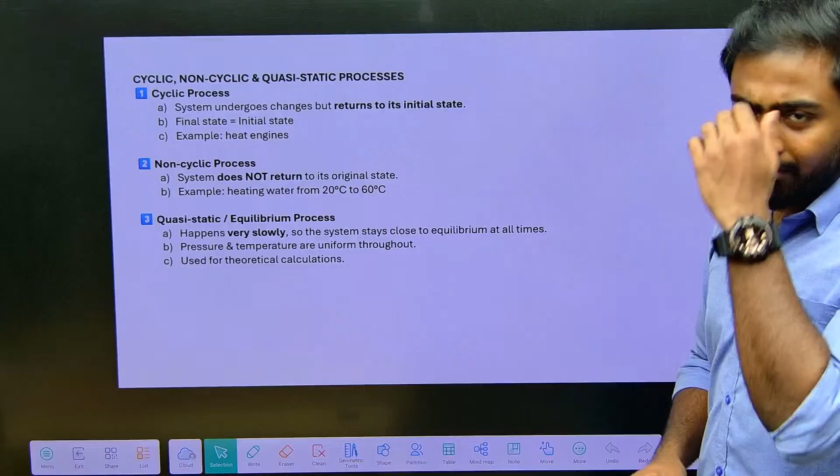So the processes we have seen like isobaric, isochoric, adiabatic, isothermal, everything, right? In last class we were discussing about isobaric, isochoric, adiabatic, isothermal. These are the processes we have seen. Now let's look into the next topic: cyclic process, non-cyclic process, and quasi-static or equilibrium process.

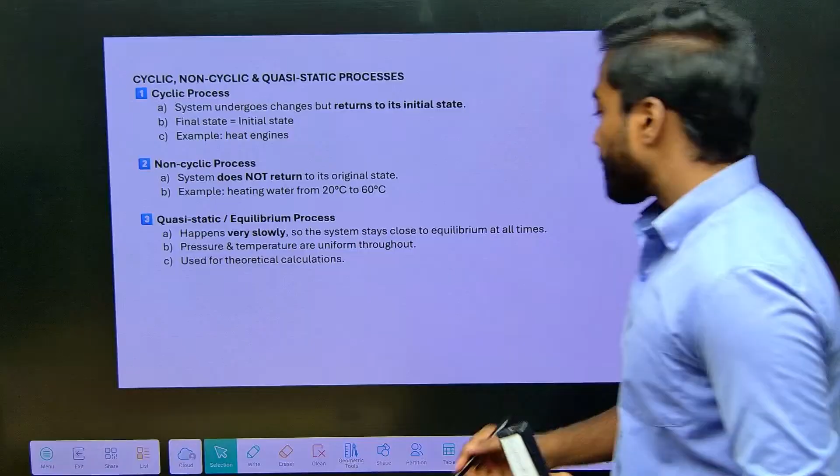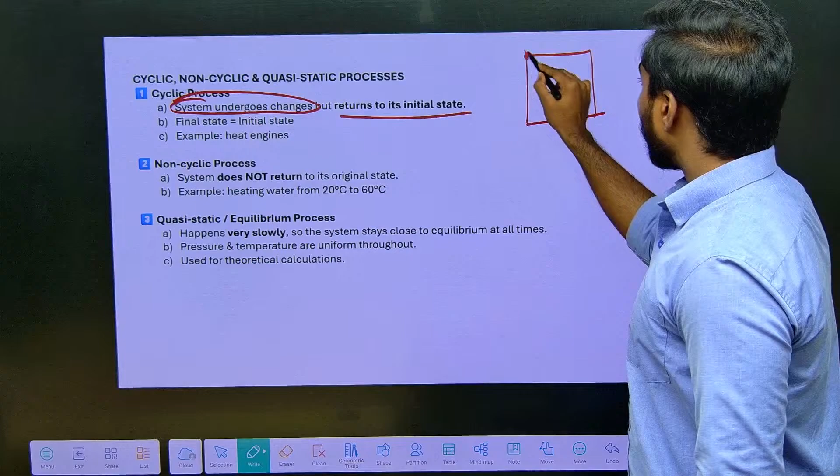Okay, so let's decode and understand, it's simple. Cyclic process is nothing but when a system undergoes a change but returns to its initial position. For example, if I take point A, it goes to point B, again point C, again point D, and again back to point A. So when I'm starting with point A, going to B, C, D, and again to A, which means I am going back to the same initial position. So final state equals initial state. That is the cyclic process.

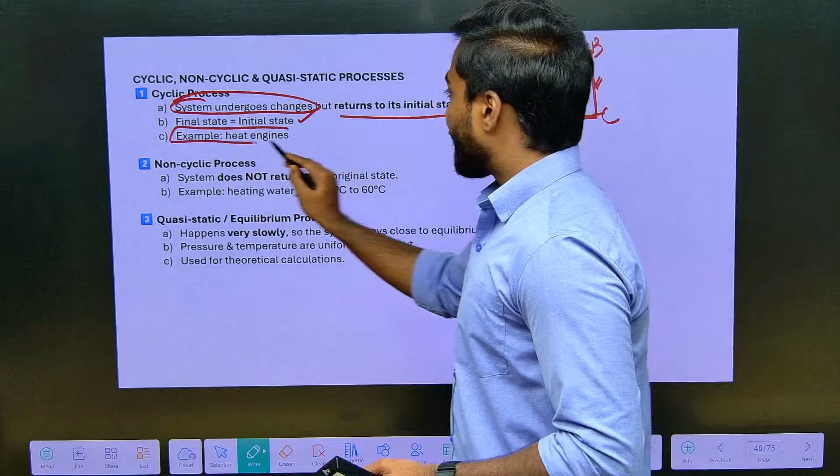And for example, the best example is heat engines.

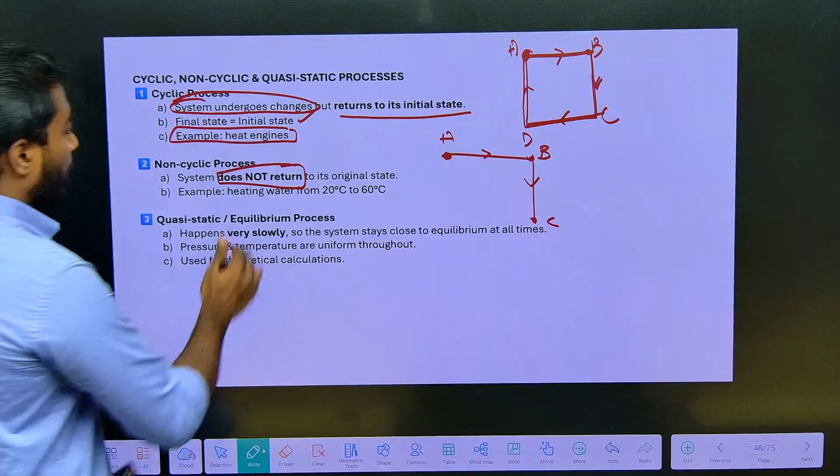Then what is non-cyclic process? A system does not return to its original state. For example, if I take point A, B, C, it has point A to B, B to C, that's it. Example: heating water from 20 degree to 60 degree Celsius. So this is the major difference between the cyclic process and the non-cyclic process.

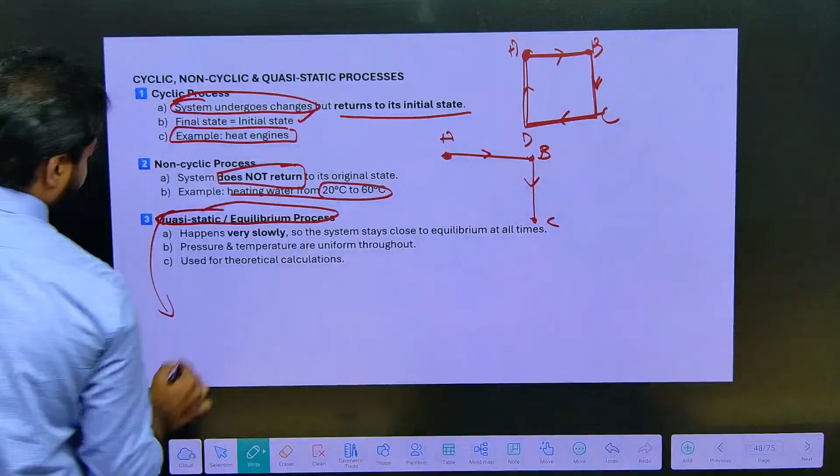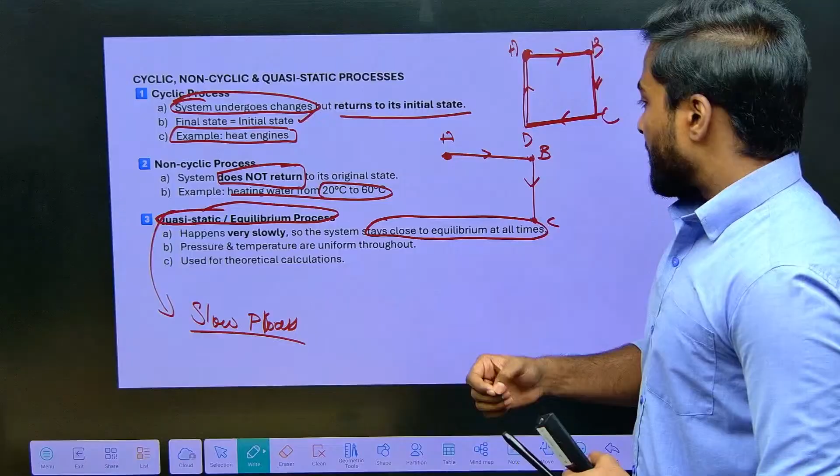When we talk about a quasi-static process or equilibrium process - quasi, we have learned the meaning of quasi, it's nothing but slow. So quasi-static process is a slow process, as we learned in the previous classes. It happens very slowly, so the system stays close to equilibrium all the time. It always stays near the equilibrium condition, that's what they are saying.

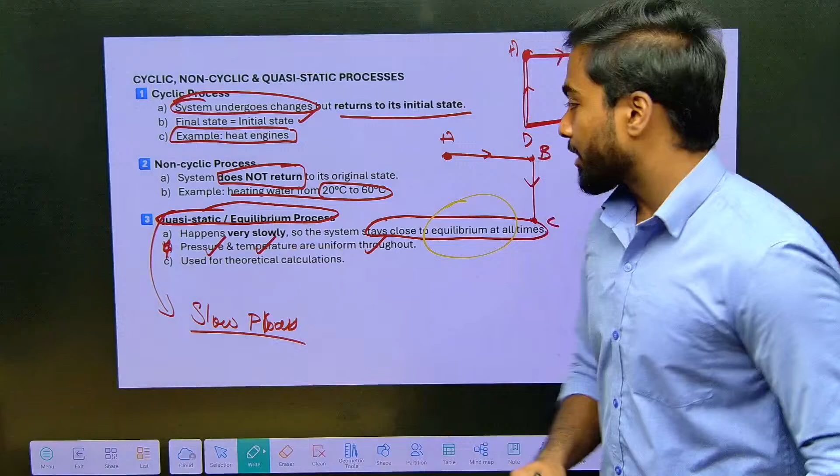And pressure and temperature are uniform throughout - this is important, guys. Pressure and temperature are constant in a quasi-static process. So pressure is constant, temperature is constant, and it's used for theoretical calculations. So this is the meaning of cyclic process, non-cyclic process, and quasi-static process.

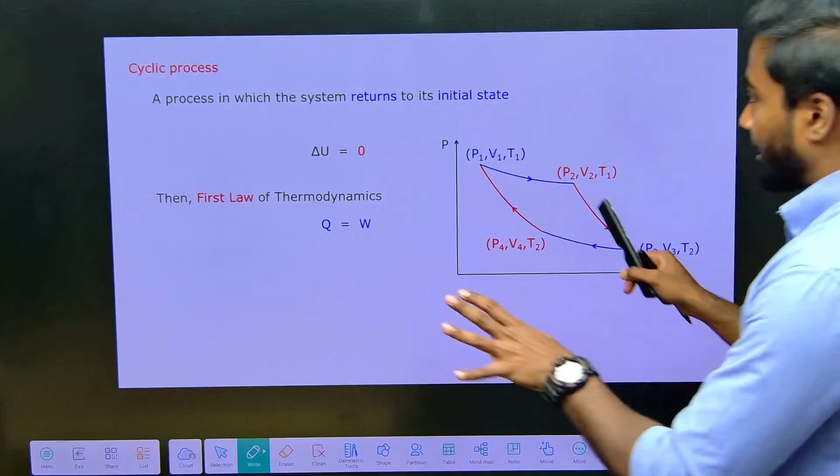Okay, and once you have taken this down, we can go for the next thing. So the next one is, yeah, we will start with the cyclic process, for example. If we see here, I am going from A, B, C and D again to A. That's the thing we have discussed in the previous slide.

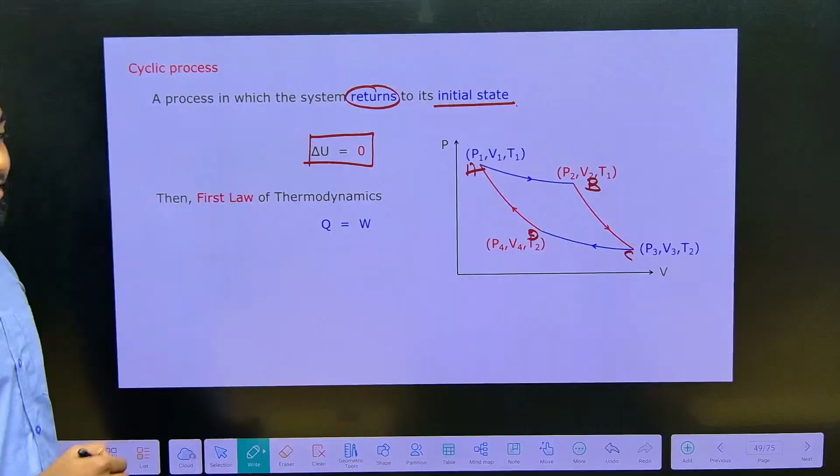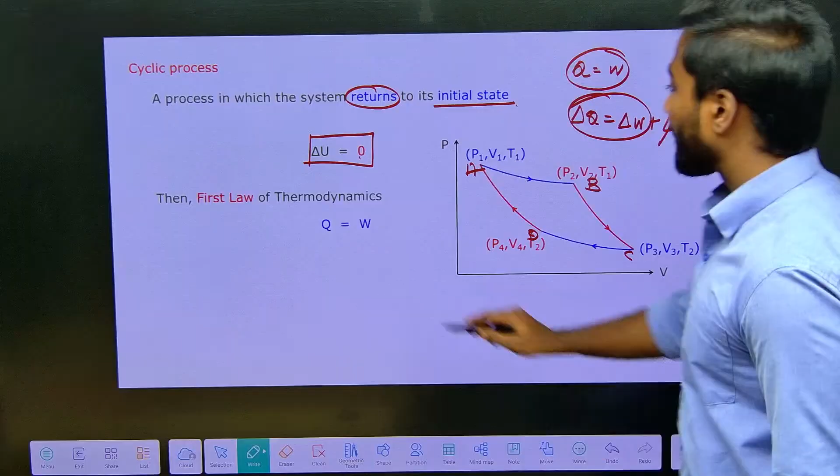So what is constant here? Since the process returns to the initial state, internal energy will be zero. And what about internal energy being zero - from the first law of thermodynamics, Q will be equal to W if U becomes 0. We know that delta Q equals delta W plus delta U, so if we neglect the internal energy term, which is 0, then we consider only delta Q equals delta W. Whatever heat is there, it equals the work done. And if we find the work done, we get the heat value. That's the thing we have learned in the cyclic process.

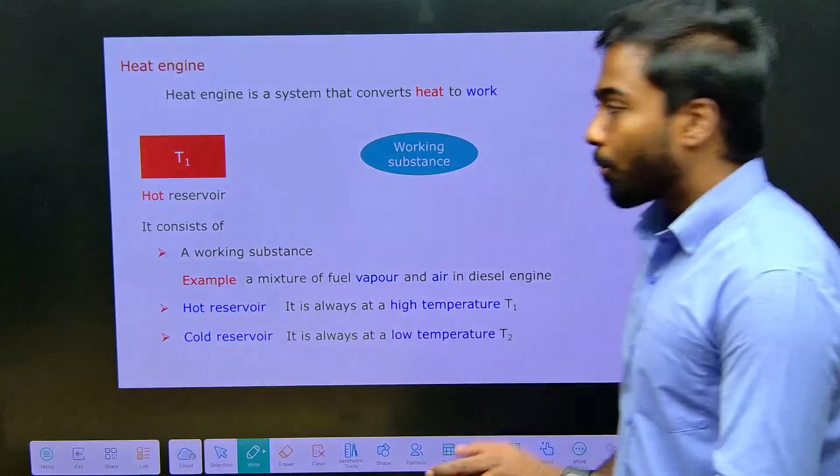So next one is heat engine. Heat engine is a system that converts heat into work. So what is the thing here? We are taking heat from a hot reservoir, passing it to the working substance, which will do some work and give out the output, and the remaining goes to the cold reservoir. So it consists of a working substance.

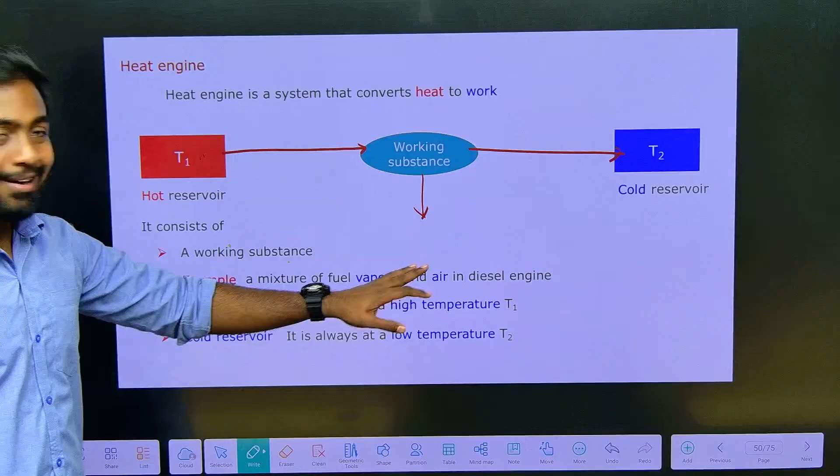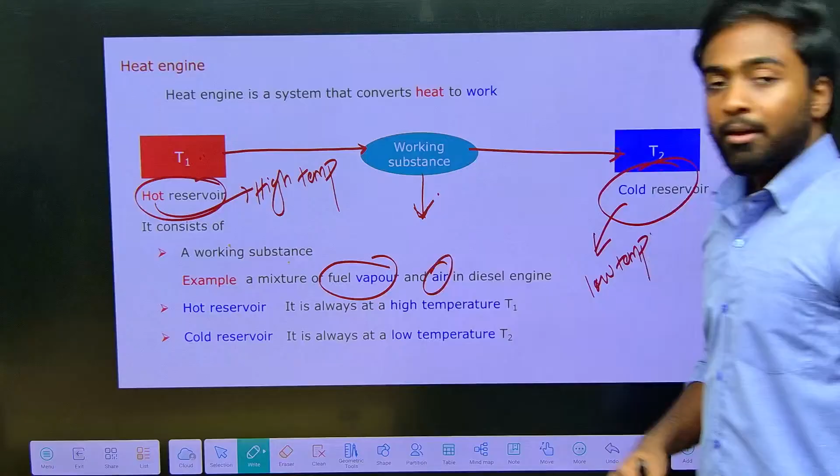Example: a mixture of fuel vapor and air in a diesel engine. Hot reservoir is always at high temperature, and cold reservoir is at low temperature. So the working substance consists of fuel vapor and air, as in a diesel engine. So this is the setup: working substance, hot reservoir, and cold reservoir.

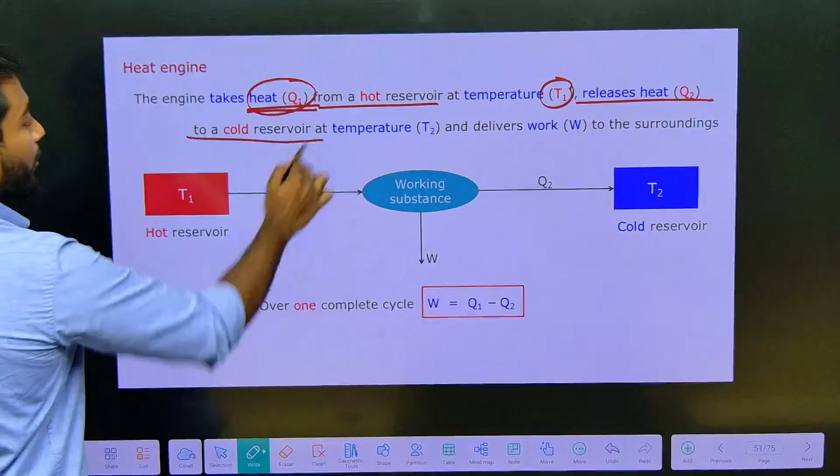So the heat engine takes Q1 heat from a hot reservoir at temperature T1, releases Q2 heat to the cold reservoir at temperature T2, and by doing this it delivers work to the surrounding. So in terms of formula, W equals Q1 minus Q2.

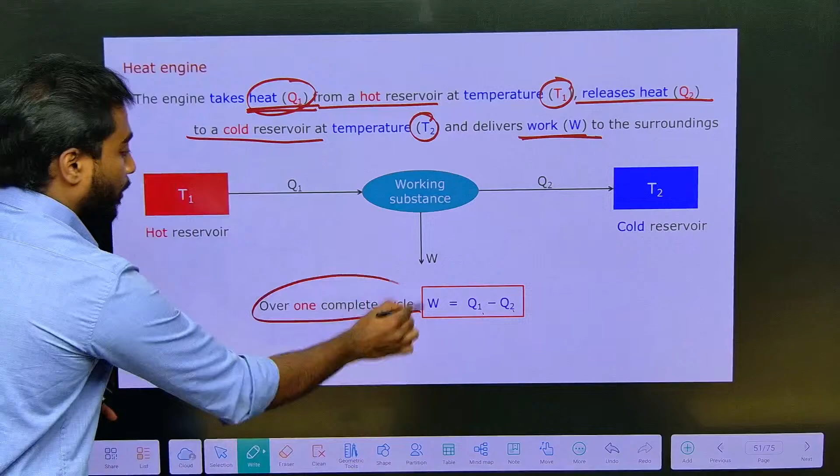Q1 minus Q2, for how much? For one complete cycle we are talking, W equals Q1 minus Q2. Right now, what about the efficiency?

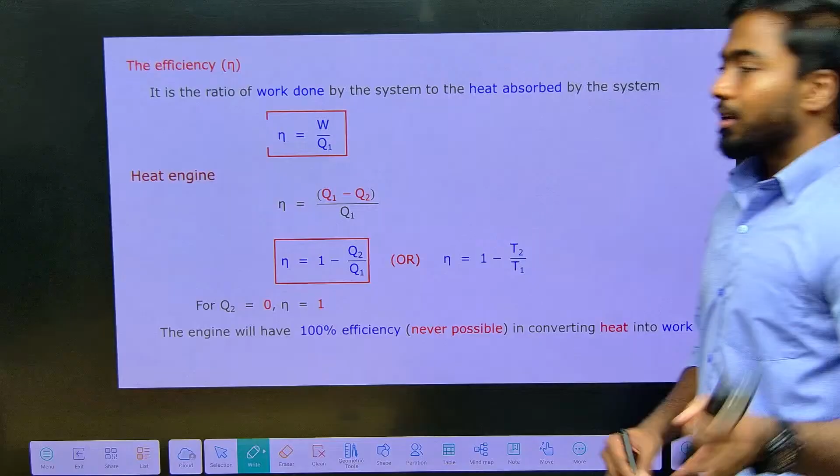Efficiency is nothing but how much work has been done. It's the ratio of work done by the system to the heat absorbed. We are observing something here.

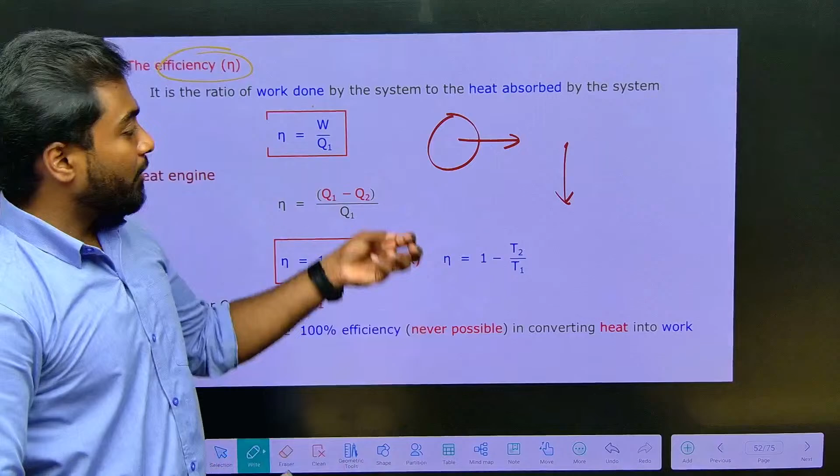If I give the total amount, for example, we are reading for an exam, and we are securing the mark as 35 out of 100. So what is my efficiency? 35% is my efficiency.

Right now, suppose if I get 77 out of 100, my efficiency is 77%. If I get 99 out of 100, my efficiency is 99%. If I get exactly 100 out of 100, my efficiency is 100%.

That's the thing. We have taken the exam for 100, but we are delivering only 35 marks, which means my efficiency is 35%. If we deliver whatever amount we have taken, then the efficiency will be 100%.

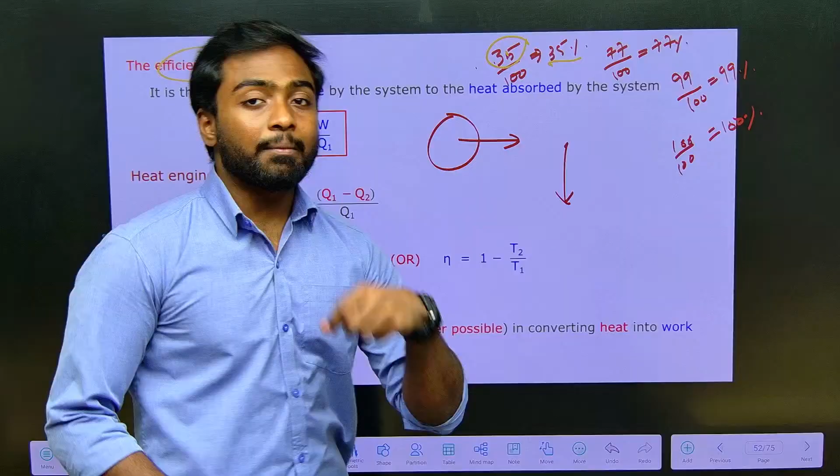But we'll look over here. It's the ratio of work done by the system to the heat absorbed by the system, which is nothing but eta equals W by Q1.

So the work done, only we are giving. From where are we taking it? From Q1 we are taking. I am producing the work done from Q1. So W by Q1.

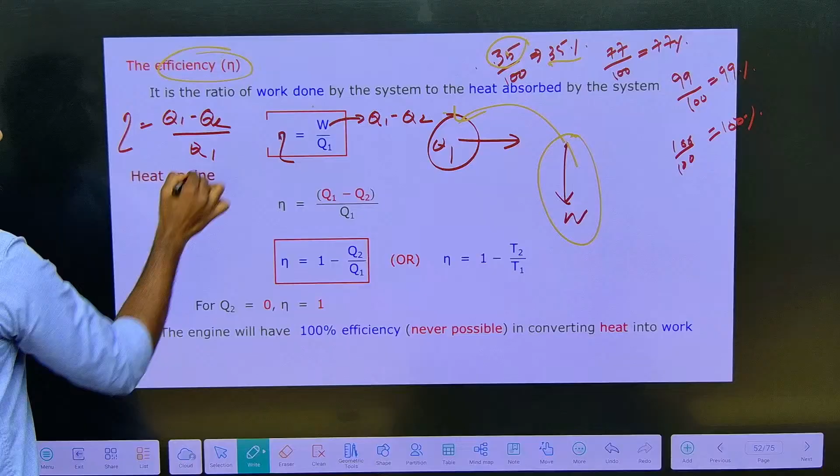So what is W? We know W is nothing but Q1 minus Q2. So eta equals Q1 minus Q2 by Q1. If I take this, Q1 by Q1 minus Q2 by Q1, the Q1 gets cancelled, so it's 1 minus Q2 by Q1. That's the eta value we have got here.

So I can write it in terms of temperature also, since this is in terms of heat. So 1 minus T2 by T1. So if Q2 equals 0, then efficiency is 1.

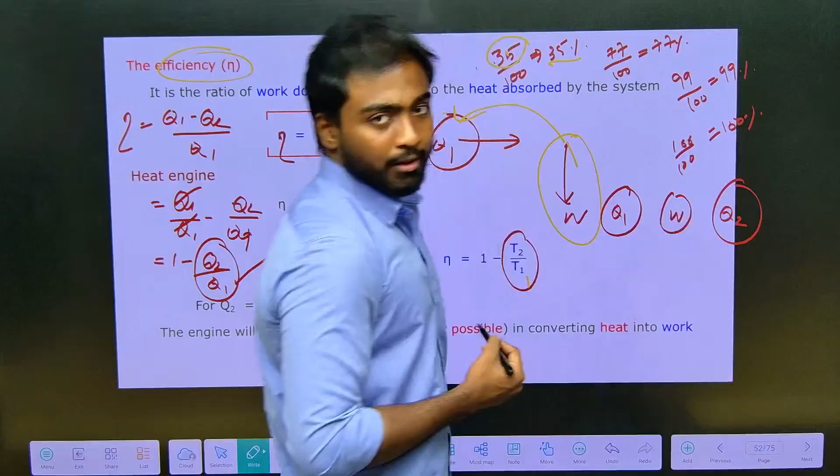Which means we are taking Q1 and Q2, and this is my working substance. So some amount I am producing here, for example 5. I am producing here how much? We will take 4.

Work done we have given is 4, but the input we have taken is 5. So how much will be remaining here? It will be 1. So what is the efficiency? Efficiency is nothing but the work done by Q1, which is 4 by 5.

So 4 by 5, how much is that? It is 0.8, so it is 80%.

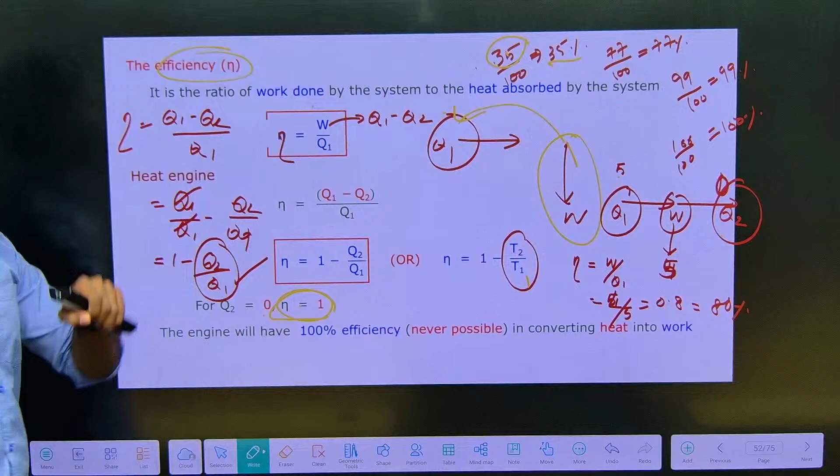So for a heat engine, 100% efficiency is never possible. It's never possible in converting heat into work. So this is about the efficiency. You can take a note of this and we can move to the next slide.

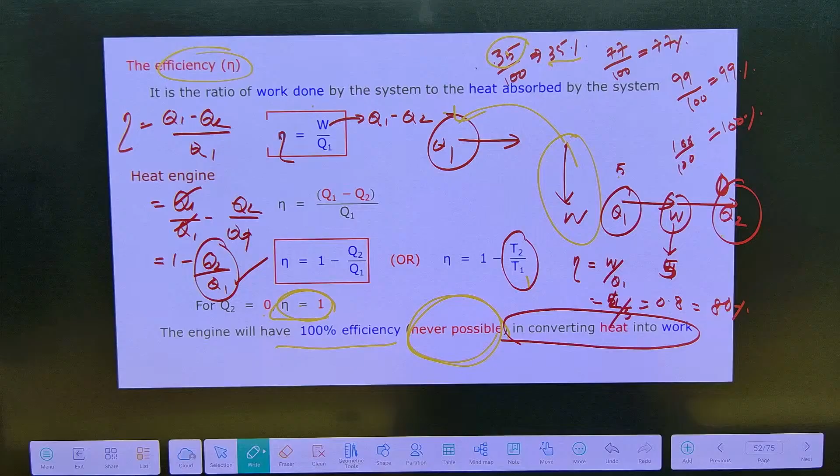Can we go for the next one? So now refrigerator. Heat engine is completed. What about the refrigerator? What is the meaning of refrigerator? We will look into the topic and go through the examples.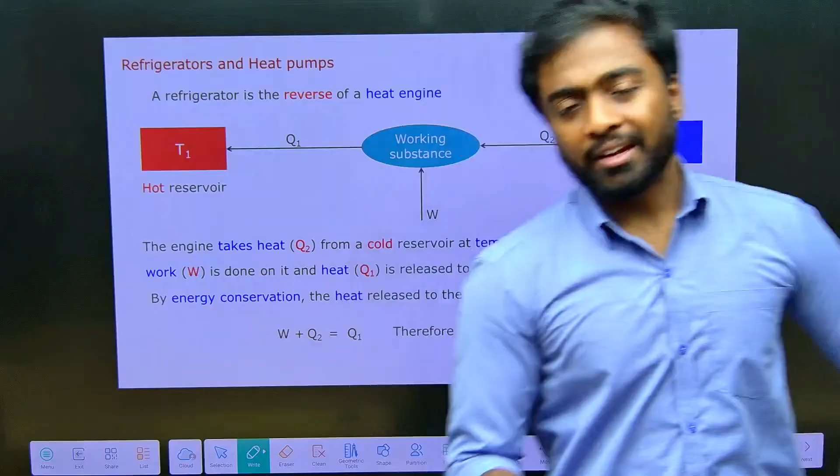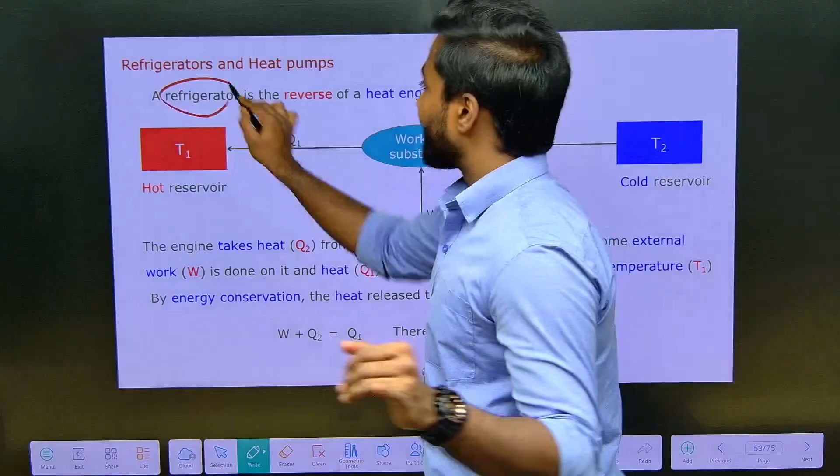Refrigerator, AC thing. What do these materials usually do? They give a cool temperature, a low temperature, right? So what we will understand here is refrigerator is a reverse of the heat engine.

Reverse of heat engine, which means we have learned about the diagram part of the heat engine here. So it will be exactly reverse. Q1 will be in this direction, and Q2 will again be in this direction. Right now, we will see here.

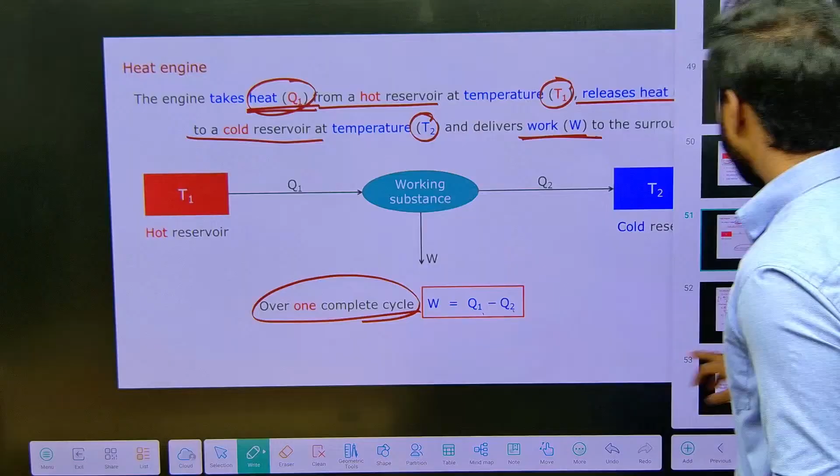Work done, Q1 and Q2. So the hot reservoir, cold reservoir, and this work done. So it's exactly opposite, right now, exactly opposite.

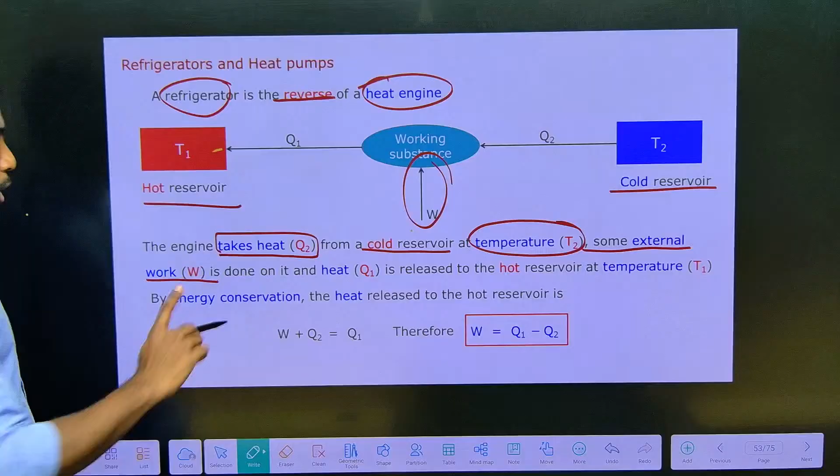The heat engine takes Q2 from the cold reservoir at temperature T2. Some external work is done on it, and heat Q1 is released to the hot reservoir at temperature T1. Got it?

So by energy conservation, when I talk about the working substance, W plus Q2 will equal Q1, right? So therefore W equals Q1 minus Q2. You can take a note of this.

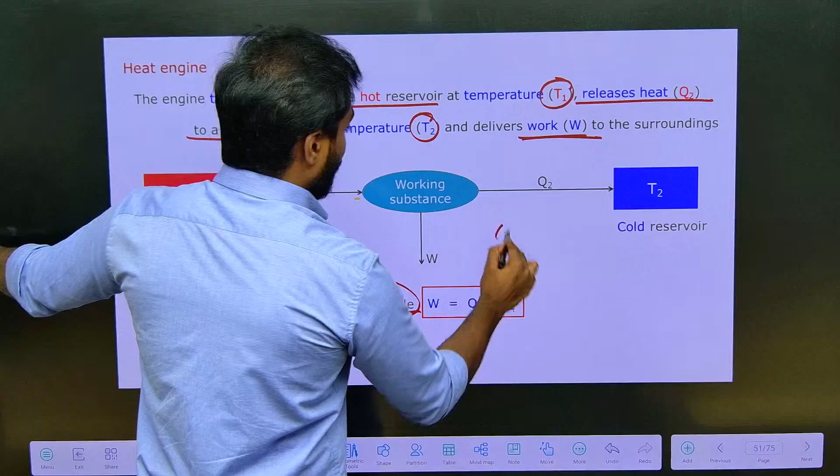Right now? So Q1 minus Q2. Here also same thing, guys. If you notice here, Q1 and W. Let me take here. So Q1 will be equals to W plus Q2.

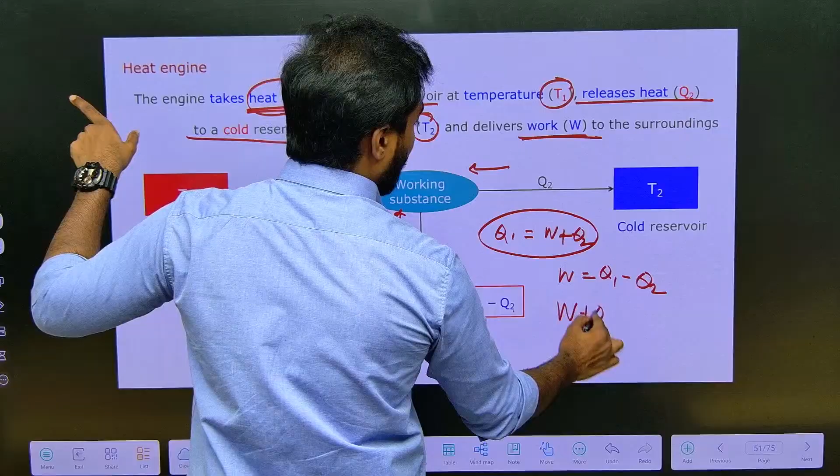So I am taking something and giving to 2, which means Q1 will be equals to W plus Q2, and W will be equals to Q1 minus Q2. That's it. So in that case, W is here, Q2 will be here, Q1 will be here. I am taking two things and giving one thing, which means W plus Q2 will be equals to Q1, where W is equals to Q1 minus Q2. We are getting the same thing.

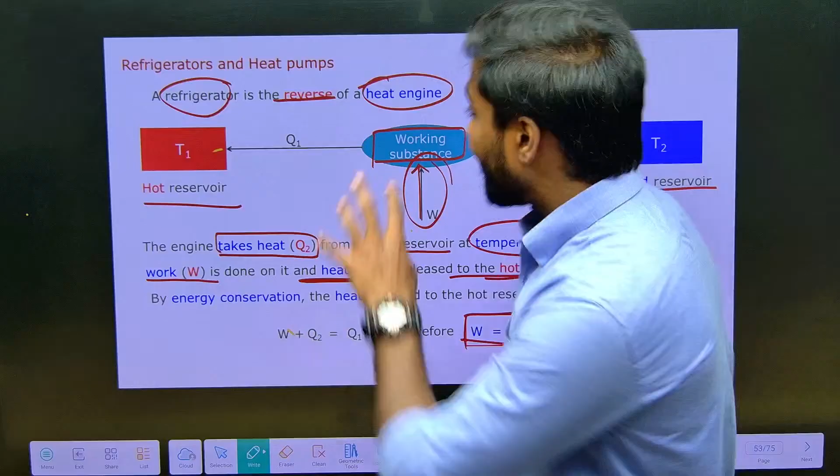Got it? So this is the thing we have done there also, okay, that's the thing we have done here. So when we talk about the efficiency in the heat engine, similar only, but the term is different. The coefficient of performance we will say COP, coefficient of performance of the refrigerator, which is denoted by the alpha.

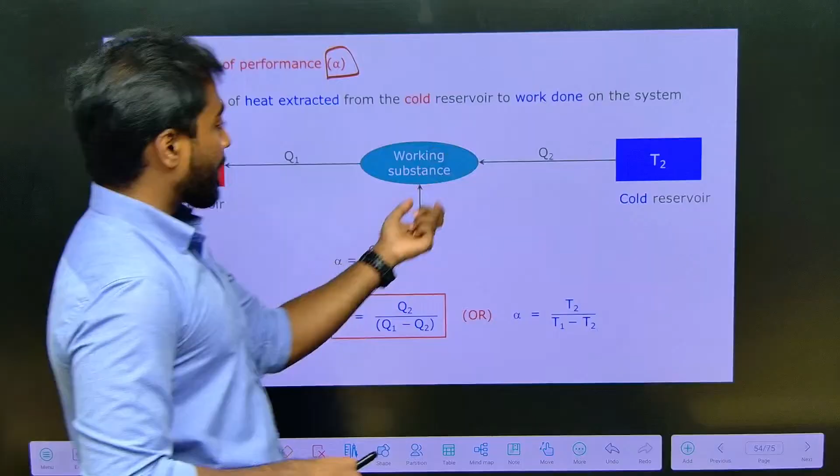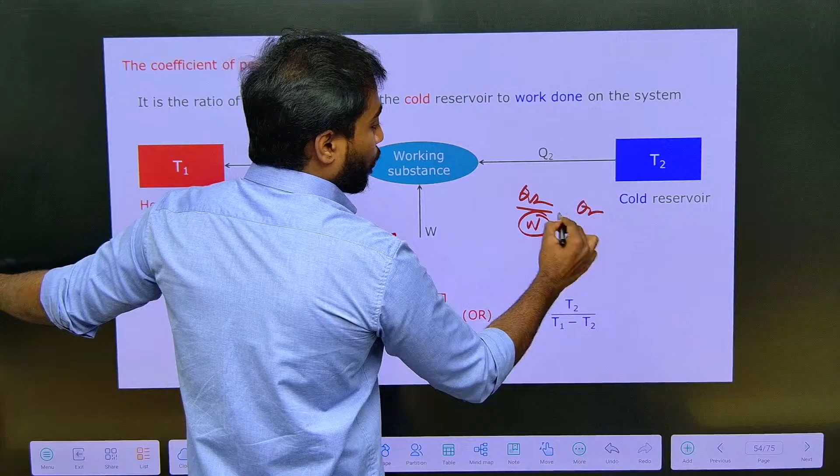We denoted by the symbol alpha. So what is alpha? Like the heat cold, like T2 we have taken, and we have taken with respect to W. So alpha will be equals to Q2 by W. So what is W? Where Q1 by W by Q1 we have taken, na? Here in the reverse process Q2 by W. So what is W? So Q2 divided by Q1 minus Q2.

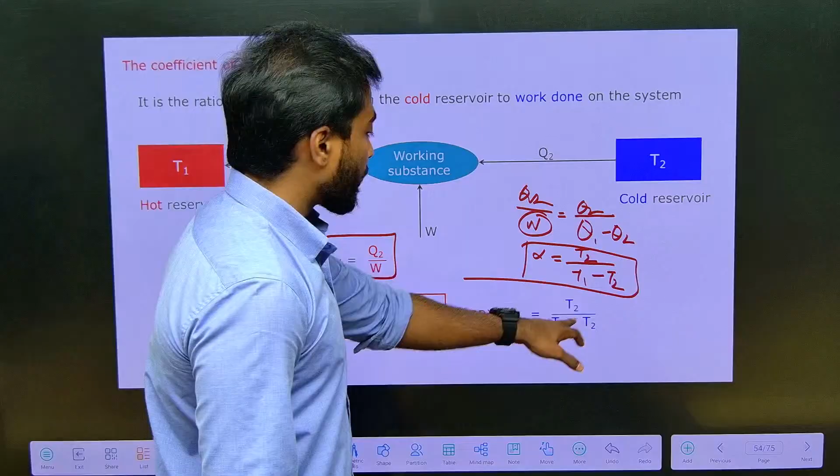Right? Q1 minus Q2. So in terms of temperature, T2 by T1 minus T2. This is alpha. That's alpha. So alpha will be equals to Q2 by Q1 minus Q2, or alpha will be equals to T2 by T1 minus T2. You can take a note of this.

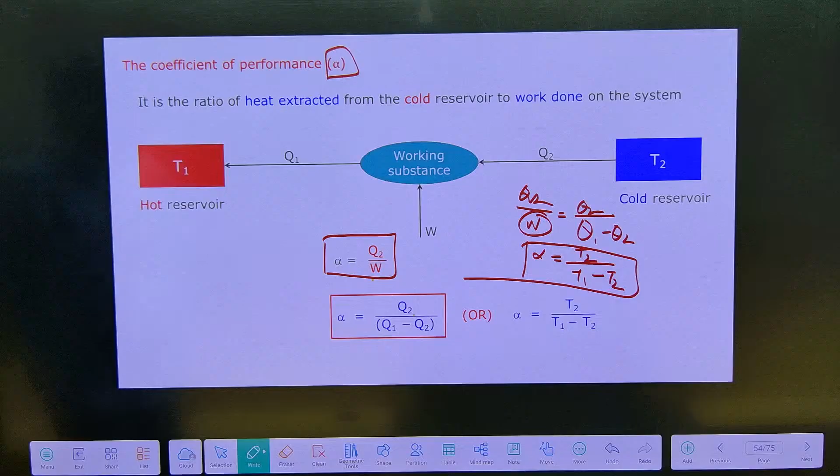Now the next one is second law of thermodynamics. So in second law we are going to see two things. So one is Kelvin Planck statement, second one is Clausius statement.

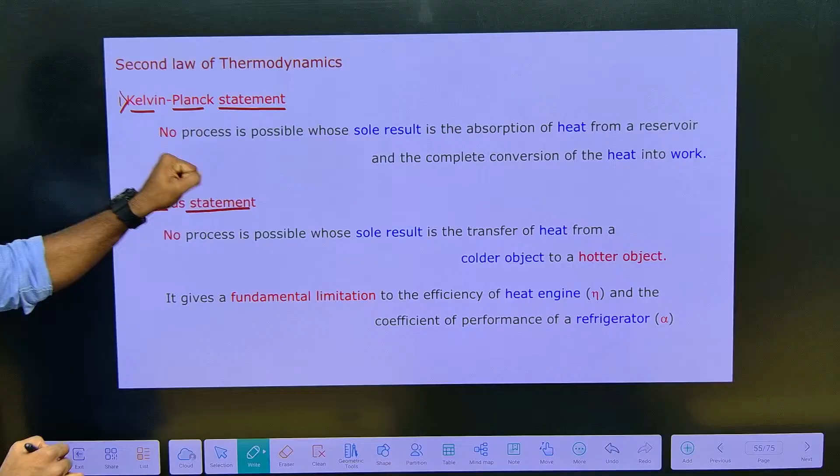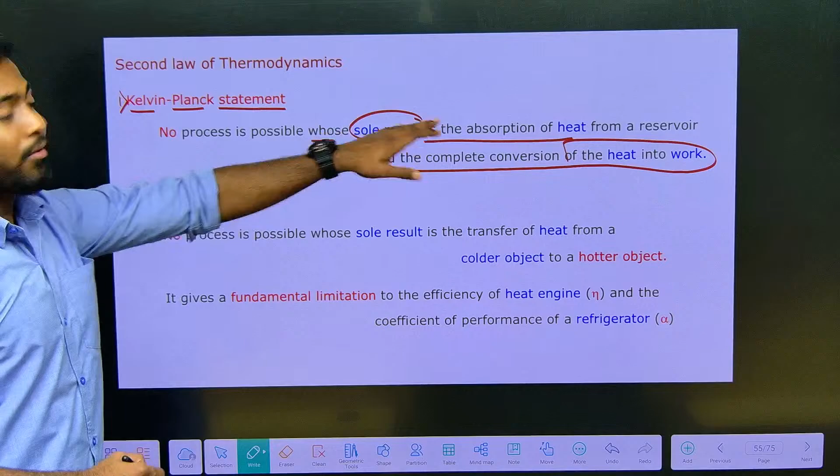So Kelvin Planck statement, what is saying? Kelvin and Planck, okay, so no process is possible whose sole result is the absorption of heat from the reservoir and a complete conversion of heat into work. It's saying like no process has a sole result, which means it's absorption of heat from a reservoir and complete conversion of heat into work. We have taken the hot reservoir and given the heat to the working substance, and if the remaining heat is there, it has been given to the cold reservoir.

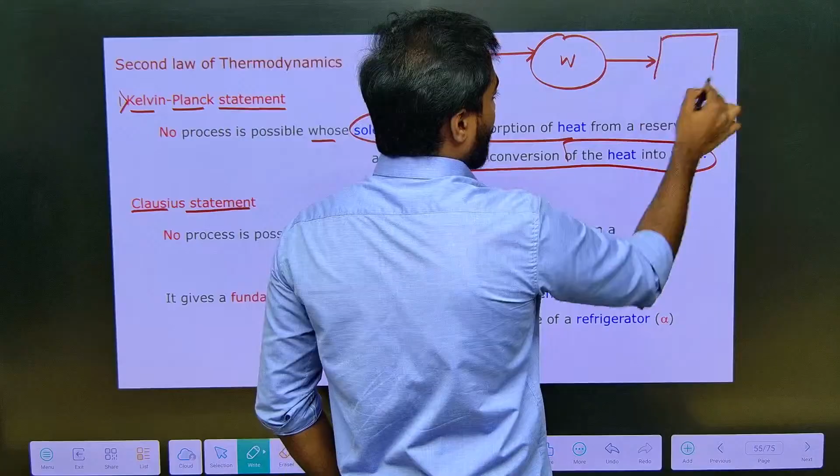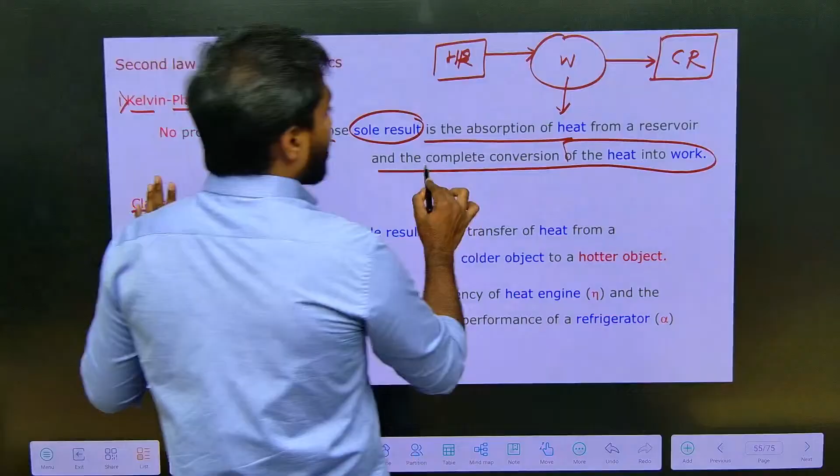So he is saying that no process is possible whose sole result, like all result, has been given into the efficiency, like proper efficiency, 100% efficiency. It's not possible, he is saying. That's the thing. Like complete conversion of heat into work, it's not possible.

And what is the second person saying? No process is possible whose sole result is transfer of heat from a colder object to a hotter object. So we'll see once again. No process is possible whose sole result is the transfer of heat from colder object to the hotter object.

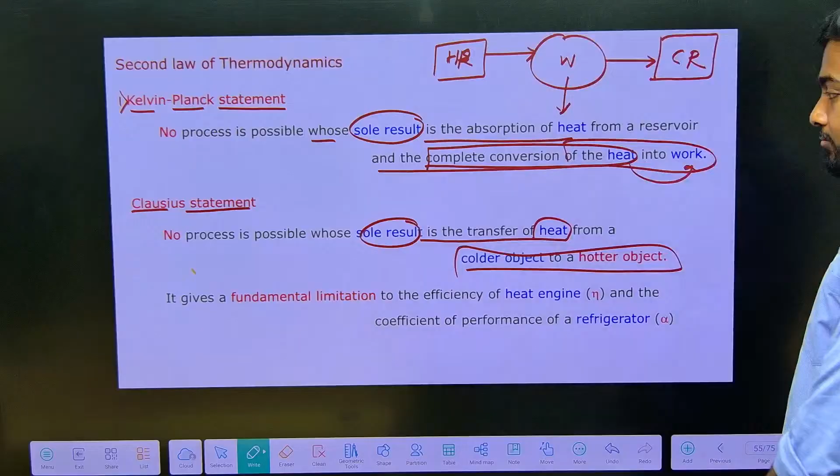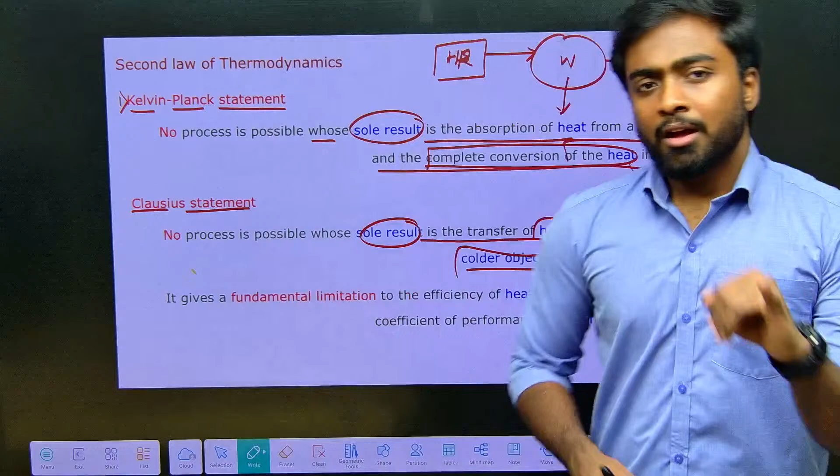Got it? So it gives a fundamental limitation to the efficiency of heat engine, that is eta, and coefficient of performance alpha. So whatever things we have seen in the last two slides, na, like efficiency eta, which is nothing but W, eta is equals to W by Q1, whereas alpha is equals to Q2 by W. So these two formulas only they are talking over here.

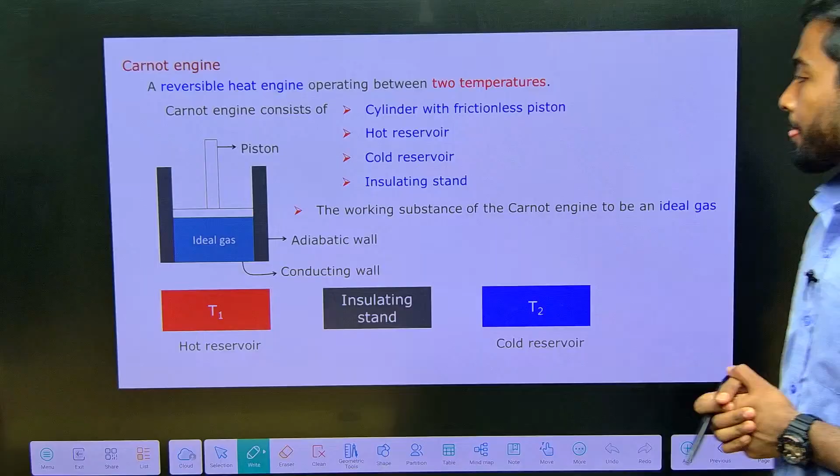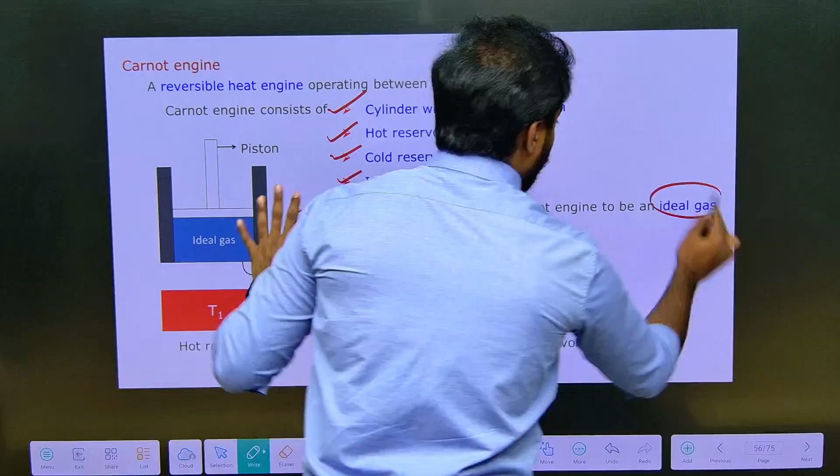So next one is a Carnot engine. A reversible heat engine operating between two temperatures. So Carnot engine consists of a cylinder with a frictionless piston, then hot reservoir, cold reservoir and insulating stand. So the working substance of a Carnot engine is to be an ideal gas. It will be an ideal gas. So like the hot reservoir will be there, insulating stand will be there, and cold reservoir also will be there. So we will talk about the process.

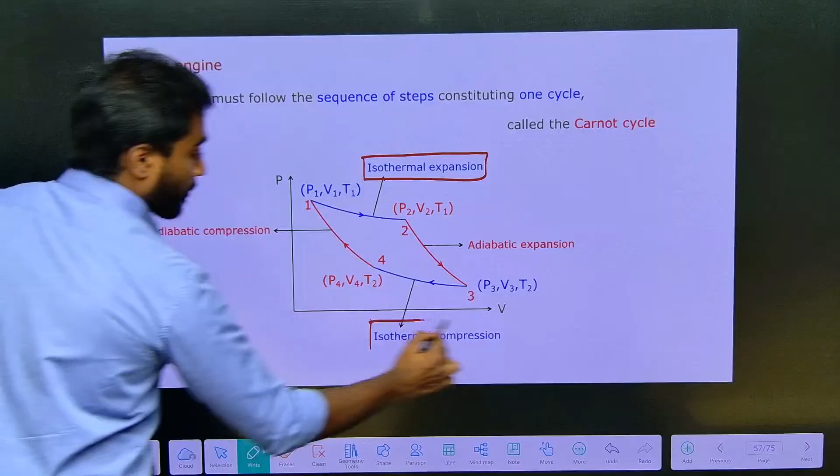What are the processes? There are 4 processes. When we talk about the 4 processes: isothermal expansion, isothermal compression, then adiabatic expansion, then adiabatic compression.

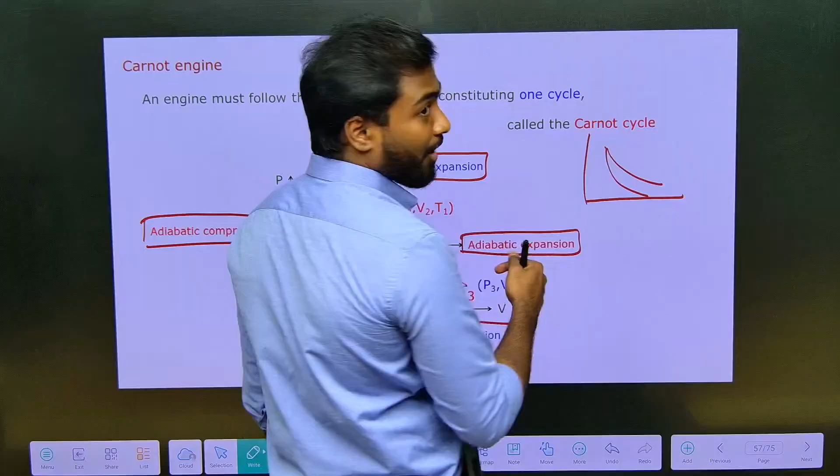So what is the difference between isothermal and adiabatic? How do we find that from the graph? We have learned that the adiabatic graph will be steeper than the isothermal graph. So this is 1 and this is 2 - 1 will be my isothermal, and the second one will be my adiabatic. So 4 processes are there.

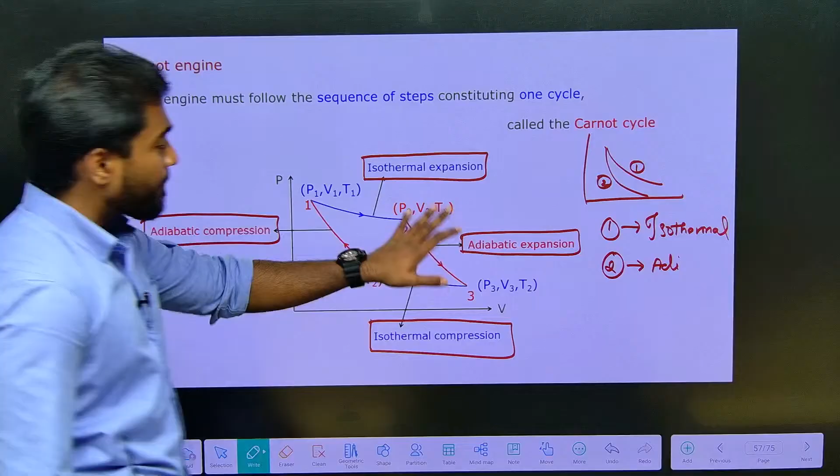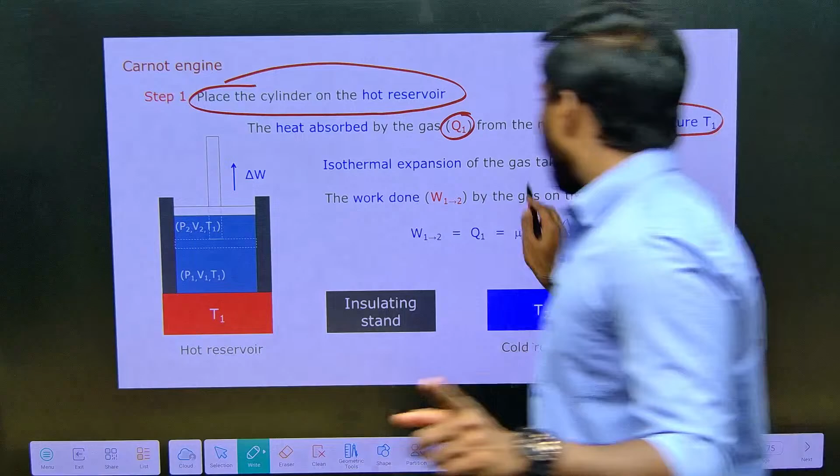Let me explain each process one by one. So first, in step 1, we are placing a cylinder on the hot reservoir and the heat is absorbed by the gas Q1 from the hot reservoir at temperature T1. So in isothermal expansion, the work done takes place.

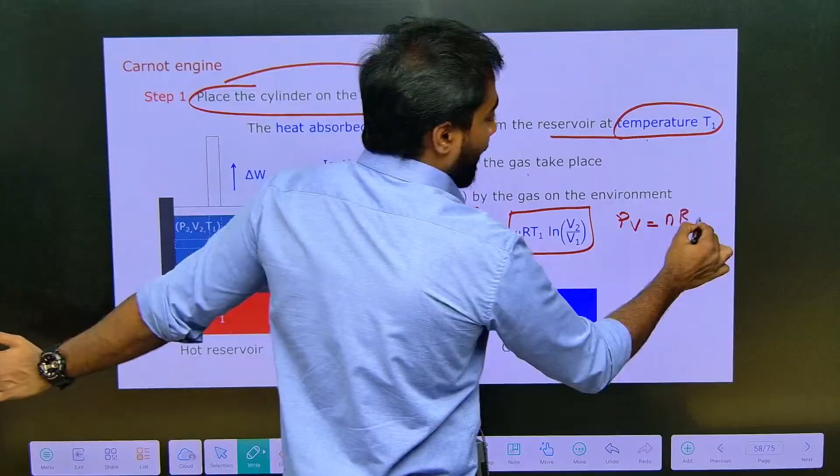So what is the work done here? It is Q1. When we talk about the cyclic process, the internal energy will be 0. So work done will be nRT. PV is equals to nRT. So work done, we know that work done is nothing but P into (V2 minus V1). So from work done 1 to 2, it's nRT ln(V2 by V1).

So we need to remember this work done. At the end we will calculate total work done, which will be equal to W12 plus W23 plus W34 plus W41. The total work done we will add up, sum it all together.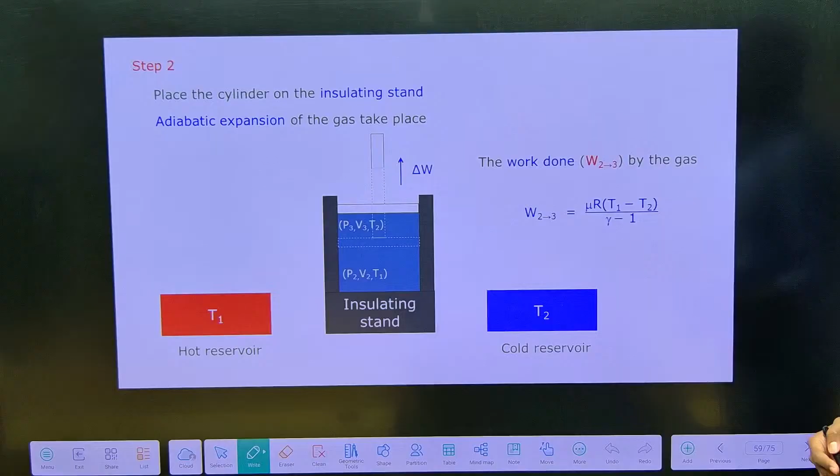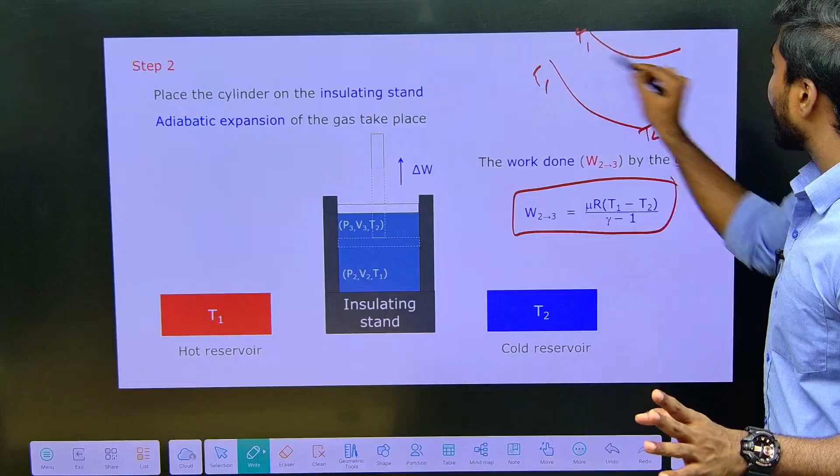So next, the work done is nR into (T1 minus T2) - the temperature is going from T1 to T2 here, since one is expanding and the other is compression. So nR into (T1 minus T2) by (gamma minus 1).

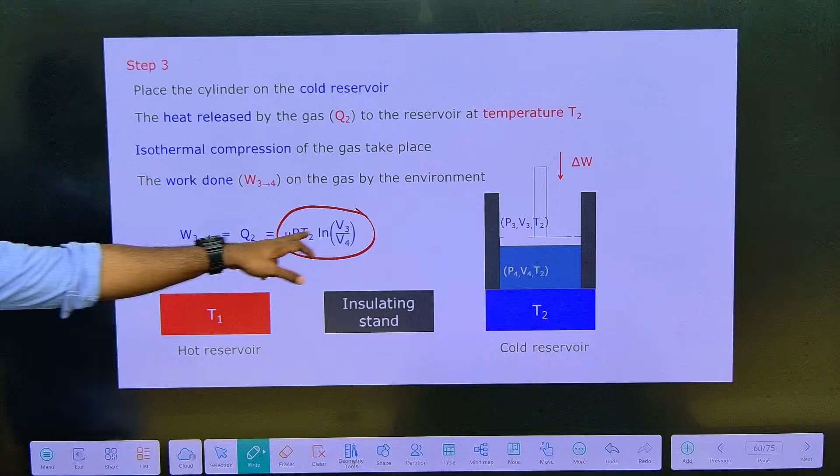So next, here nRT2 ln(V3 by V4). In that case, nRT1 ln(V2 by V1). So next, the final one: nR(T1 minus T2) by (gamma minus 1).

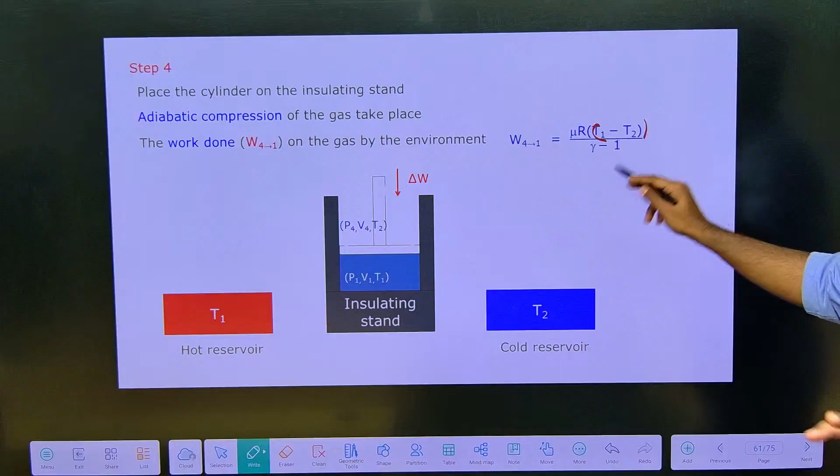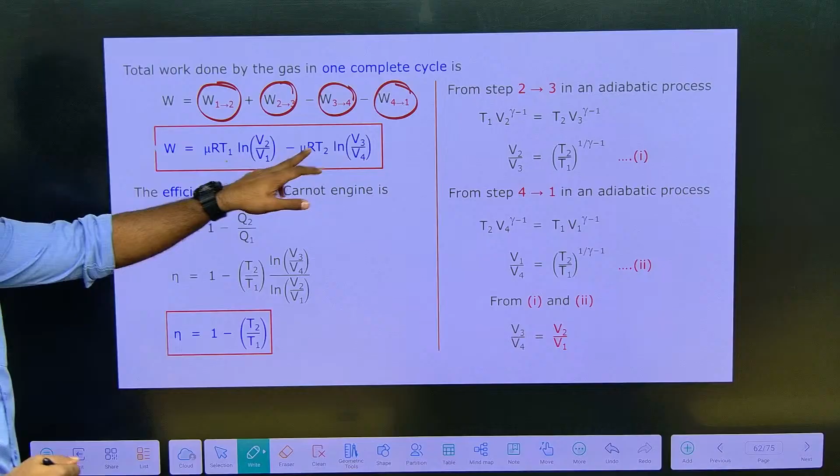Now we will find the total work done. W is equals to W12 plus W23 minus W34 minus W41. So finally we get W is equals to nRT1 ln(V2 by V1) minus nRT2 ln(V3 by V4). And what about the efficiency? Efficiency is nothing but 1 minus T2 by T1.

You can just take the formulas - the formula is important for us right now. You can take the formulas and leave the derivations. You can neglect the derivations and just take out the formulas.

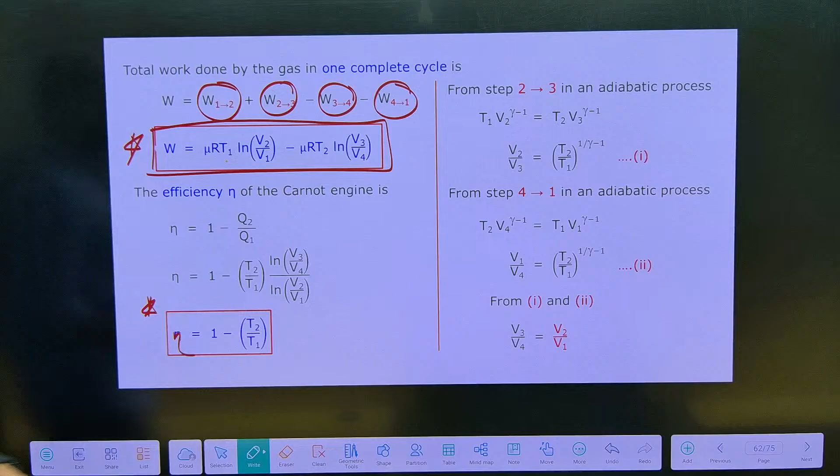So next we will see what is the Carnot theorem. Two given temperatures, T1 and T2. What are T1 and T2? T1 is a hot reservoir and T2 is a cold reservoir.

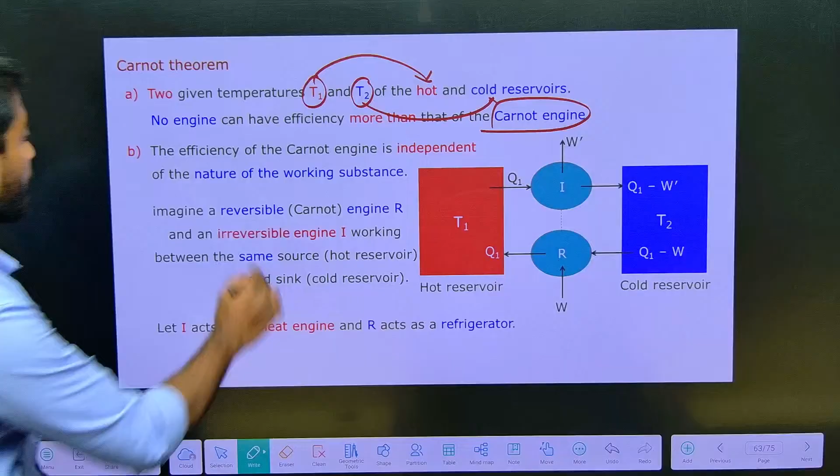So no engine can have efficiency more than that of a Carnot engine. We have seen a heat engine, we have seen a refrigerator - no one can have efficiency which is more than the Carnot engine. That's the first thing. Second, the efficiency of a Carnot engine is independent of the nature of the working substance.

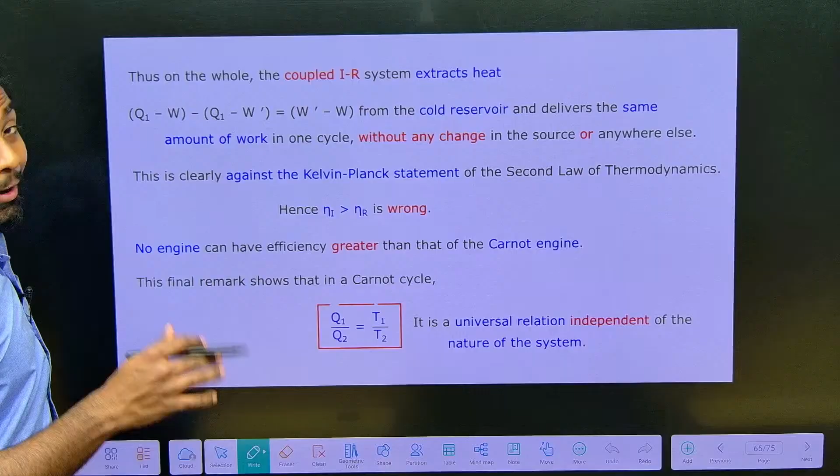So there are 2 points. Next, the last point - like we have learned, this is not a normal example, leave aside the example. No engines can have efficiency greater than the Carnot engine, which shows that Q1 by Q2 will be equal to T1 by T2. It's a universal relation independent of the nature of the system.

So this is about the thermodynamics chapter, and with this I will conclude this chapter. In the next class we are going to concentrate on the EAPCET questions of this chapter. So be attentive to the classes on time.